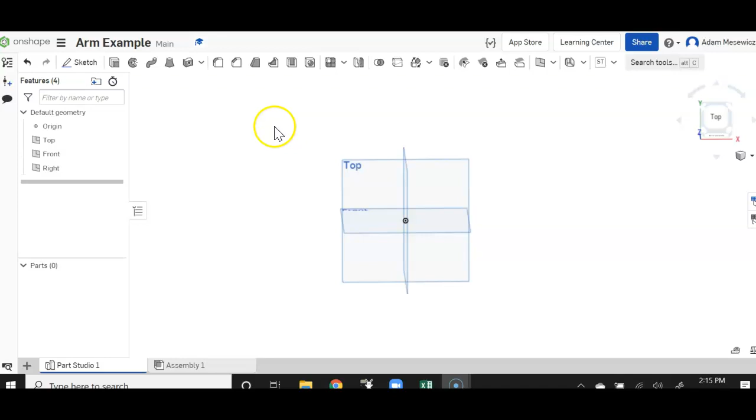Alright, so in this video I'm going to show you how to create an arm for a catapult.

So we're going to start our sketch on the top plane as we usually do. The first object we're going to create is the arm itself. We want the arm, and then there's going to be a payload part where you put the ball, and then there'll be an axle that attaches to the main frame. So there's really three main components to this.

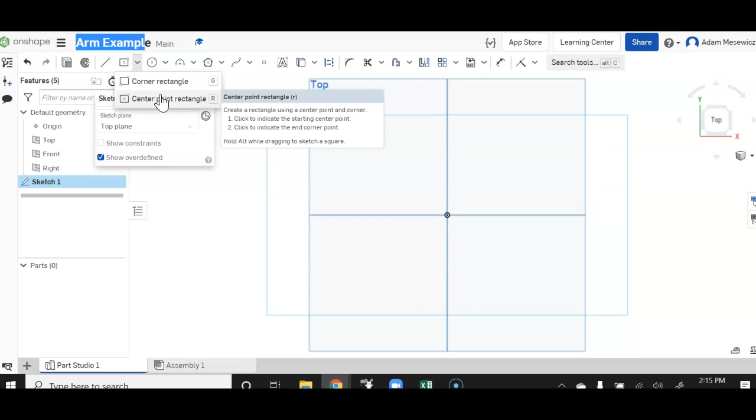We're going to start with a center point rectangle to make the arm itself. Depending on your specific diagram, that will determine the dimensions. I'm just going to set this to be 100 by 20 because that's a good size. So that's the first part. Now I'm not going to extrude this until I finish the other two parts as well.

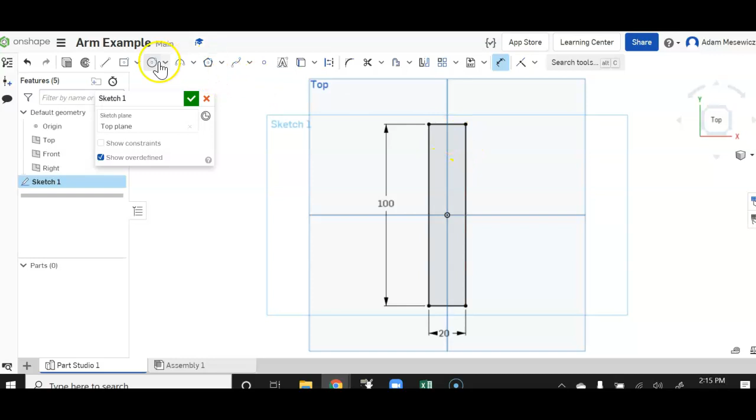So the next thing I need is a circle, and that's going to hold the actual ball. So I want that circle right there. And now you can see I have what's starting to look like this arm.

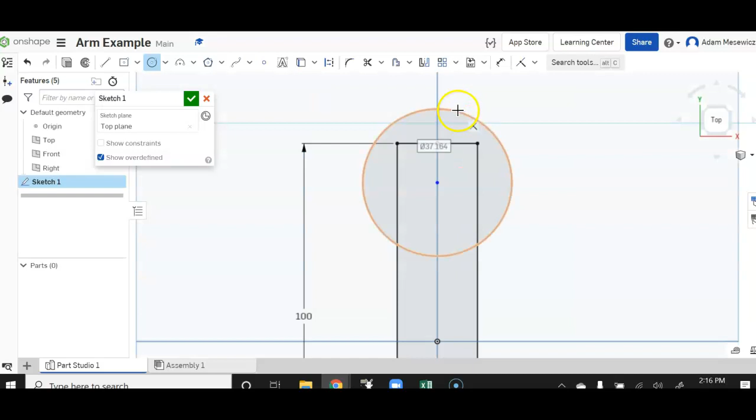We're going to put the axle down here, but before we do that, we want to cut out all of these extra lines that we don't want. So I'm going to use my trim tool to cut these out because they're not necessary. And now we can see we have this kind of spoon shape that's going to launch our ball.

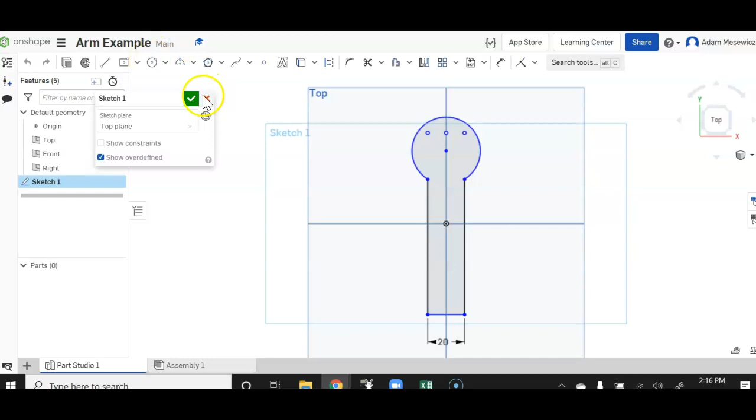So the last thing, oops sorry, we need to be in that sketch one more time. The last thing we need to do is create the area where, well, we'll do that after we extrude this.

So we'll go ahead and extrude this. How thick do we want it? Again, it depends on your specific design. I'm going to make that 10 millimeters thick. Yours might be thicker, might be thinner, again depending on your specific design.

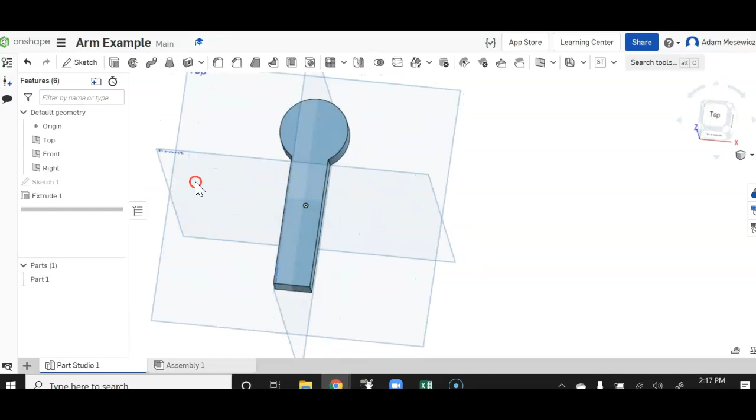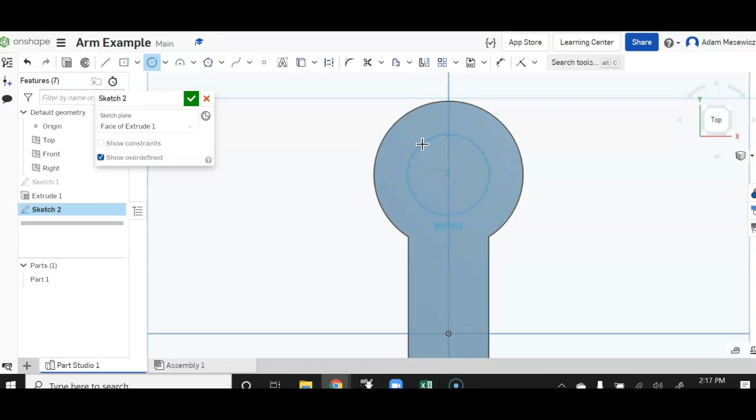But before we create the axle, we need to create an area on our spoon where the ball would sit. So we'll do one more sketch, this time on the face of the extrude, and create a center point circle centered at the same point as before. We'll make this so the ball has a diameter of 20. We don't want it to be exactly 20, we want it less than 20, so maybe 18 would be a good measurement. So we'll dimension that to be 18.

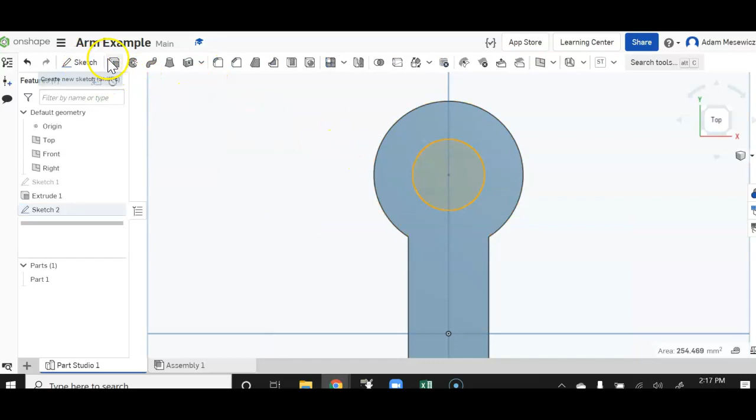And we'll remove some of this material so our ball actually sits in there nicely. Maybe 5 millimeters would be good. So now you can see we have this place where the ball is going to sit.

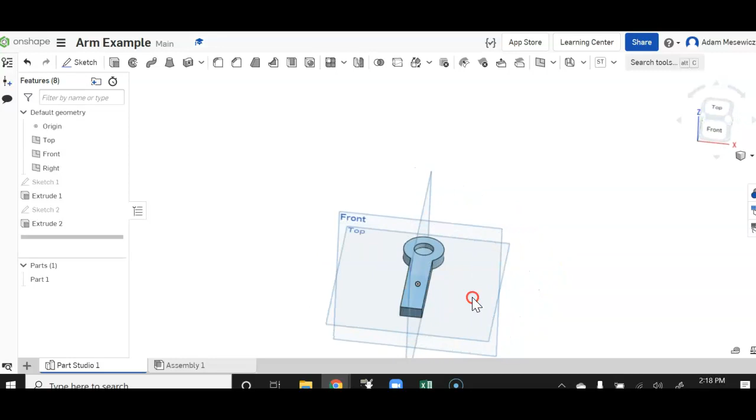We have the arm. The last thing we need is the physical axle that's going to attach and rotate with the base. To do that, we're going to create a sketch, and actually not on the extrude itself, we're going to do it on the right plane, and you'll see why in just a second. So again, I'm creating a sketch on the right plane.

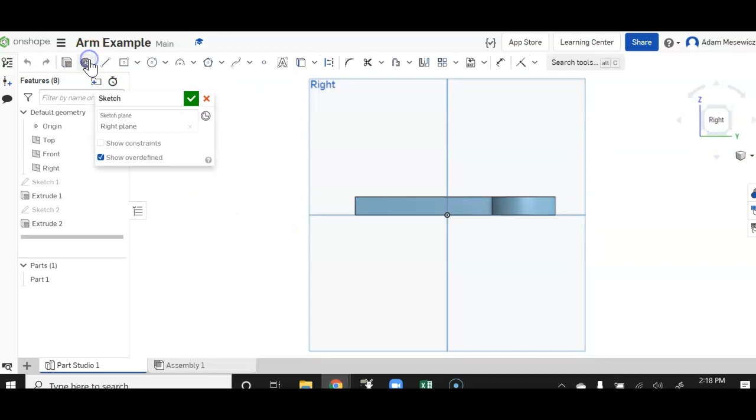And this sketch is going to have a circle. Where do I want the circle? Well, I want it to be right here at the bottom of my arm, and I really want it to be on the exact end. So I need to add in some different constraints and dimensions.

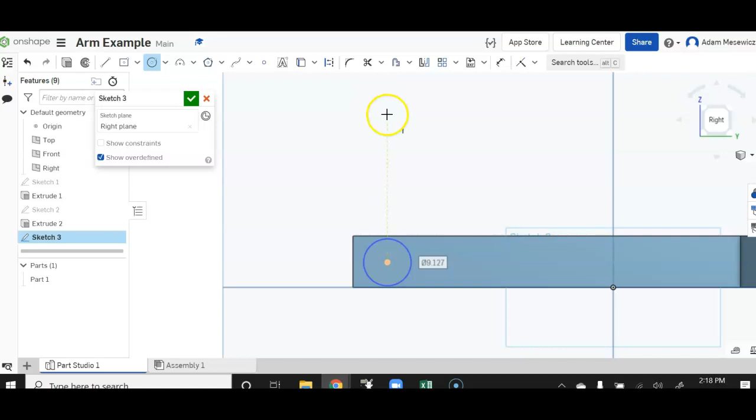The first thing I want to do is dimension this circle. And I don't want it to have a diameter of 9, that's going to be way too big. So 5 would be a decent diameter for the axle itself.

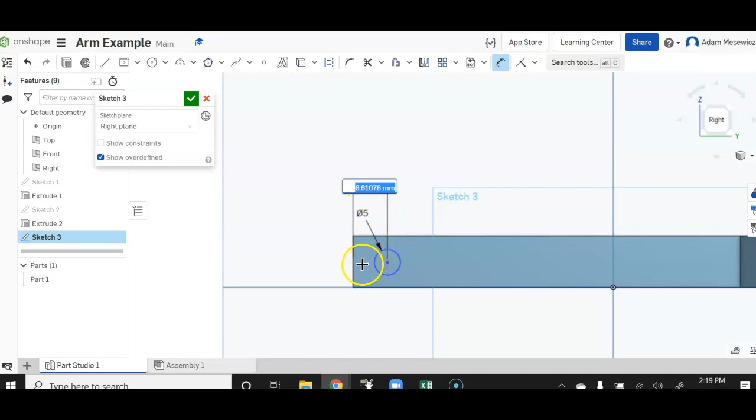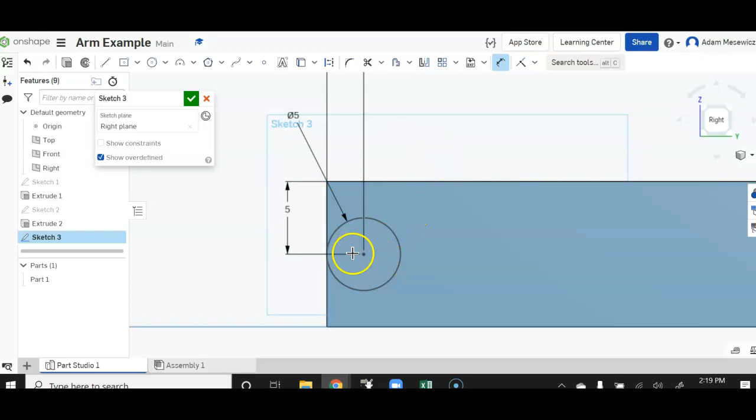But then we need to put it a specific distance away from the bottom. In this case, if our diameter is 5, that means the radius, or the distance between this end and the middle of the circle, needs to be 2.5. So you can see now I have this here. And the last dimension is I want to make this in the very center. So if this is 10 millimeters thick, half of that is 5. And now I know this axle is located right in the middle of the bottom of that base.

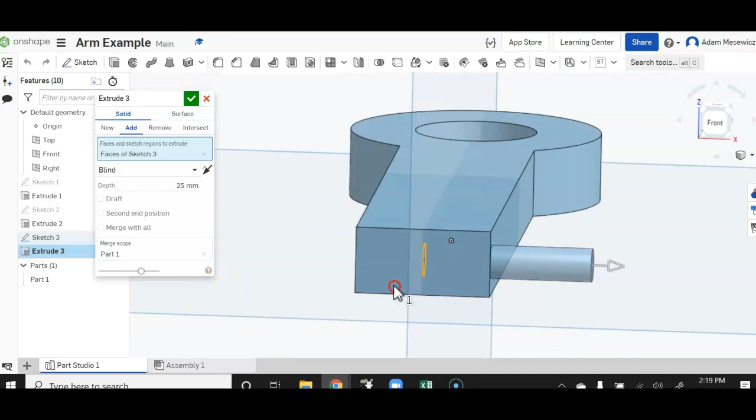Okay, so now I have that confirmed, you can see I have this sketch here. So now I'm going to extrude this, but I'm going to do a different type of extrude, because if I only do it going one direction like we usually do, then I won't have anything on the left side, and I don't want that. So we need to change this from blind to symmetric.

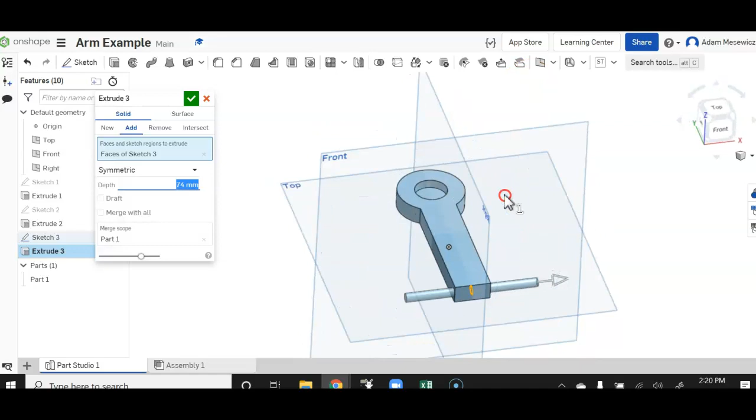And now you have the opportunity to make this as big or as small as you need. Remember, the maximum this could be is 80 millimeters wide, that's the max. If you have some caps on the end or something like that, you're probably going to be doing this somewhere in the 70s, maybe even 74, just depending on what your base looks like. So you'll need to adjust that based on your design.

But once you confirm that, you'll see that you have this arm that can rotate up and down on a base that you should have already created.